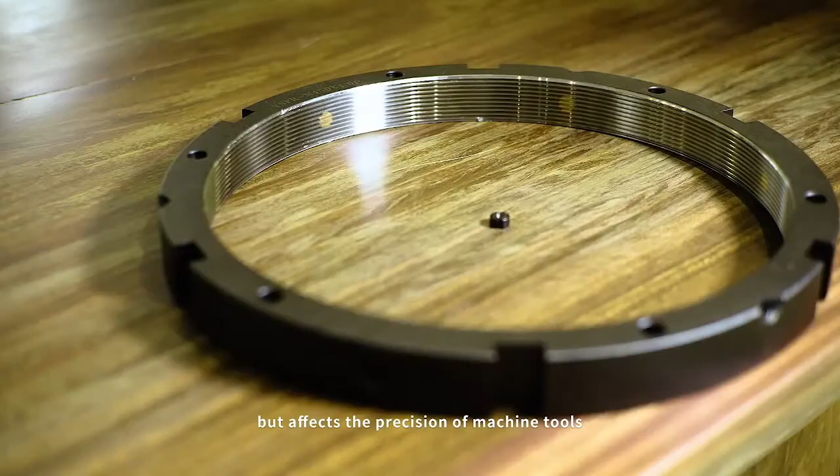No matter how advanced the systems technology of the world's factories, all require key precision components. The manufacture and supply of key precision components is a crucial point that affects all development. The manufacture of a nut is small and unremarkable, but affects the precision of machine tools.

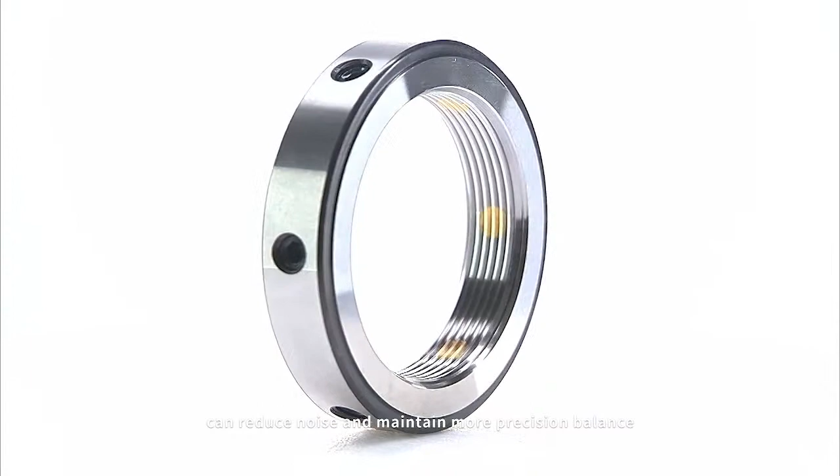YINSH Precision is one of the world's top 3 precision nut makers, fastening a spindle or ball screw on mechanical equipment. It can reduce noise and maintain more precision balance in dynamic environments through high-speed balance screws, or the world's only axial force sensor, to help our clients assemble products more precisely.

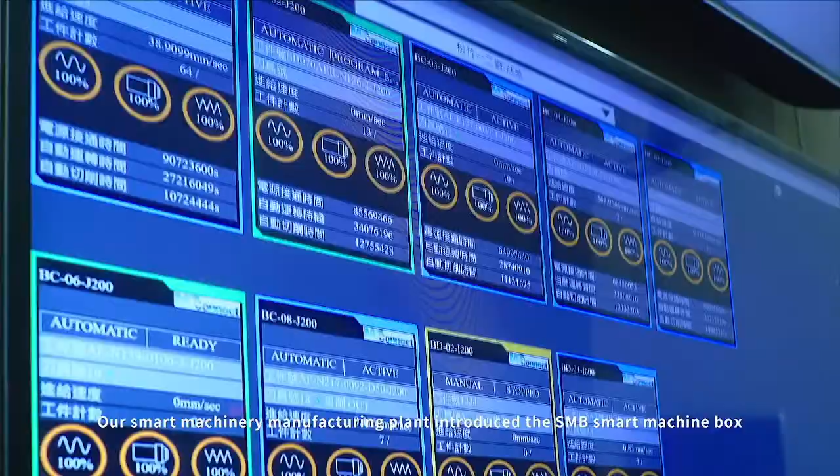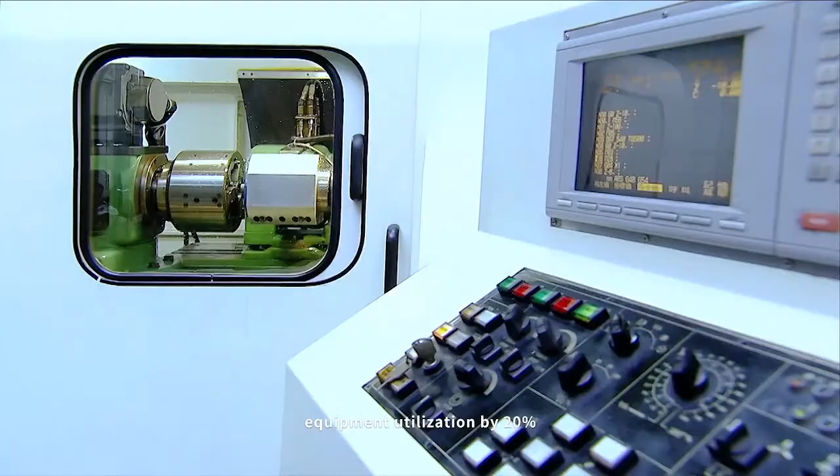Our Smart Machinery manufacturing plant introduced the SMB Smart Machine Box. Per capita output value went up 13.6%, equipment utilization by 20%, continually improving competitiveness. With algorithms to predict product life, you can cope with many emergencies.

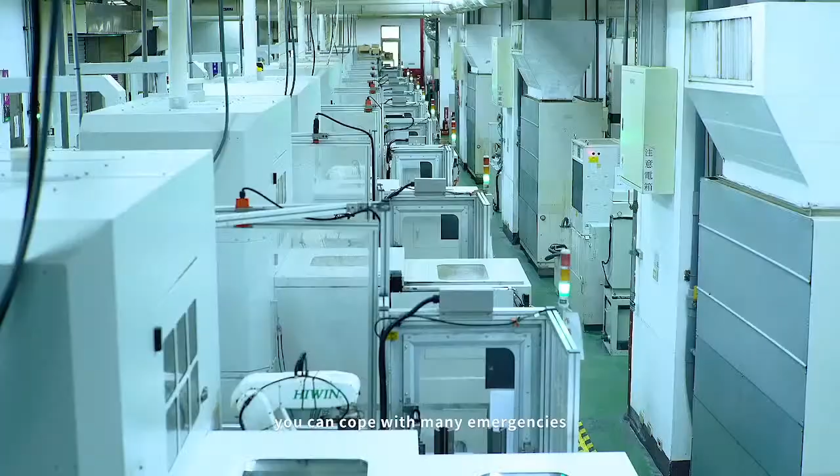HIWIN is a global top 3 precision ball screw and linear transmission component maker with R&D centers around the world. Of the machine tool equipment in use around the world, more than 1/3 carries our HIWIN brand. Thanks to our technology, these machine tools give precision to transmission control and mobile positioning.

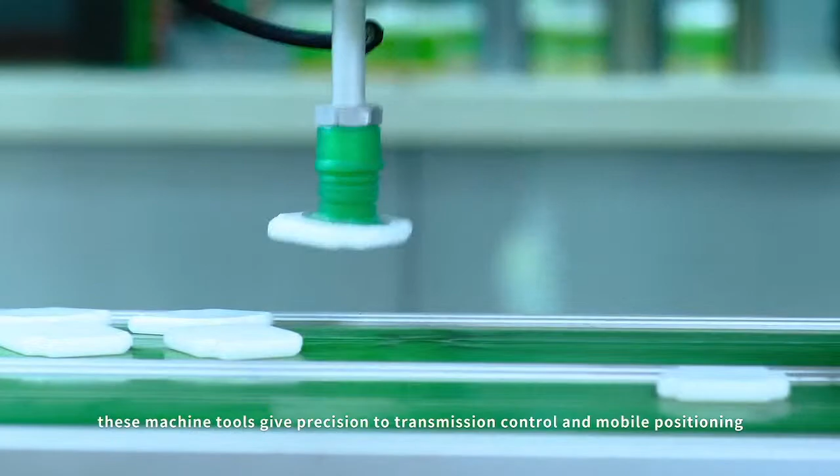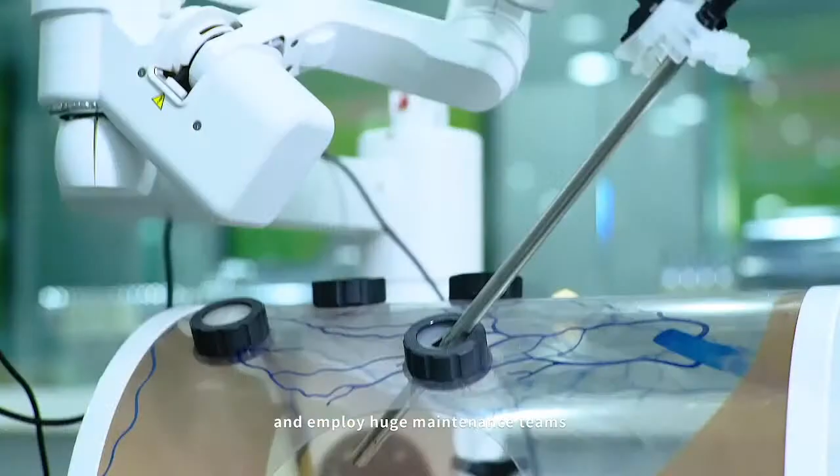We embedded sensors in smart screws that can detect lifespan, thermal deformation, vibration and lubrication levels. This means multinational machine tool customers no longer need to always be on alert and employ huge maintenance teams, saving them many costs and expenses.

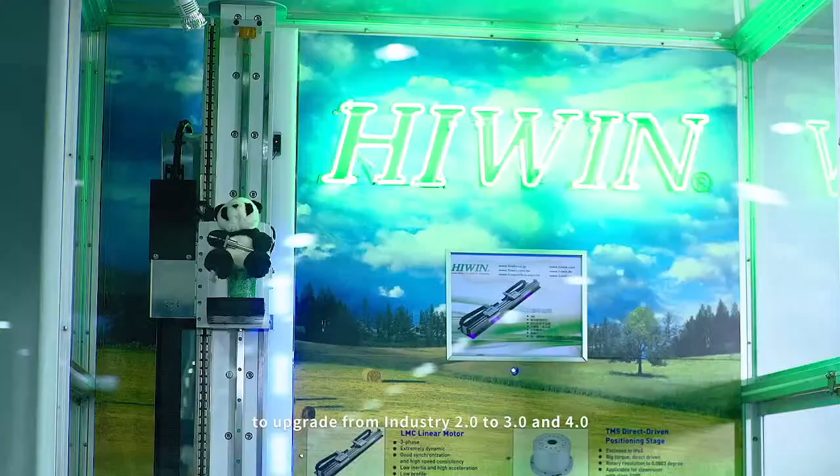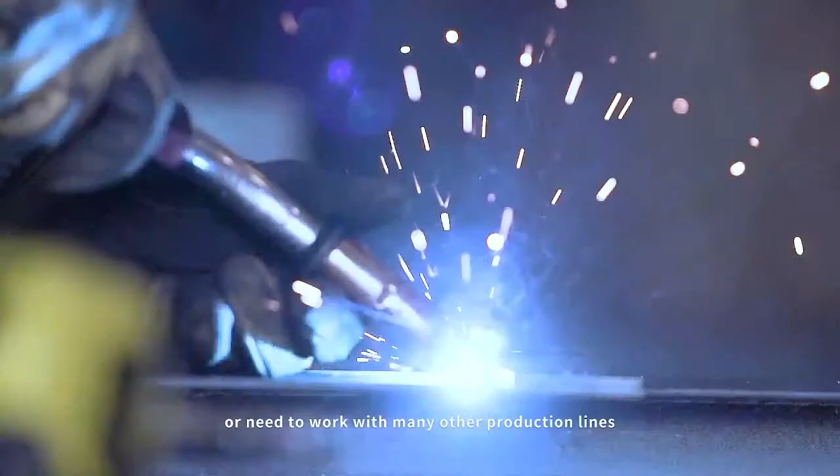The traditional plumbing and hand tool industries, with our help, have developed automated production lines to upgrade from Industry 2.0 to 3.0 and 4.0. The capacity of traditional production lines is limited. They can often only complete one link or need to work with many other production lines. Now, with full line and whole plant upgrades, a single production line can complete dozens of types of components.

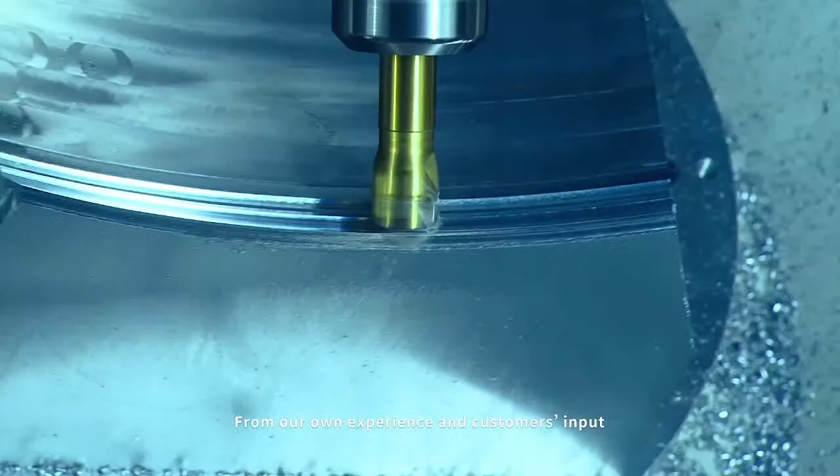As a crucial point, YINSH Precision and Highway must stand firm to inspire the midstream and downstream supplier line to stimulate more industry opportunities, drawing from our own experience and customers' input, helping more manufacturers to invest in smart manufacturing.

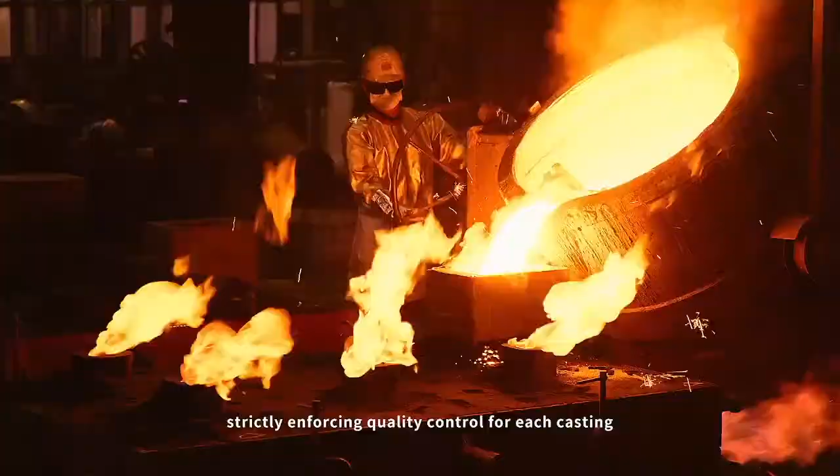All of YCM's casting is completed at its own foundry, strictly enforcing quality control for each casting, implementing the YCMPX lean production model to create their own smart factory.

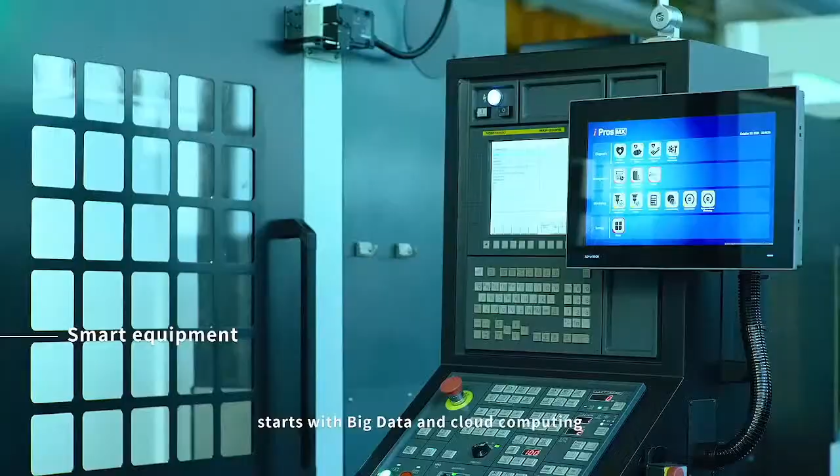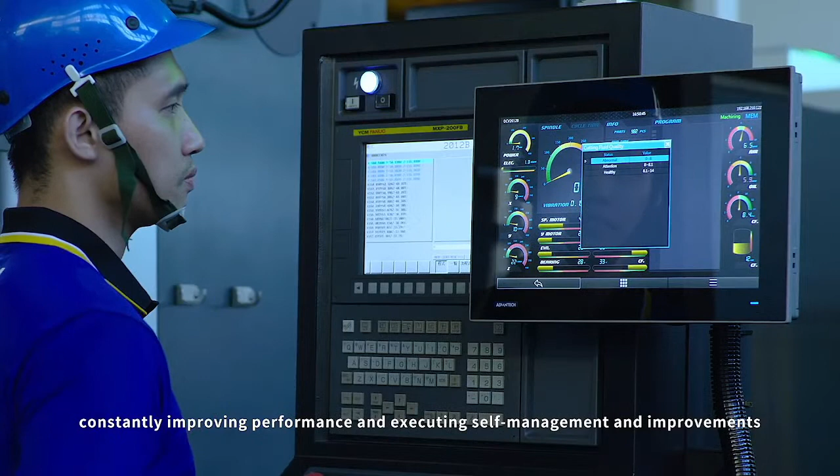We believe smart manufacturing starts with big data and cloud computing. The IoT Smart Management Platform links various automated and smart soft and hardware equipment, constantly improving its performance and executing self-management and improvements. Integrating IT, OT, and CT helps managers control the factory utilization rate and monitor OEE, achieving a non-stop, zero waste, and zero defect smart factory. Integration of industrial point, line, and surface is key.

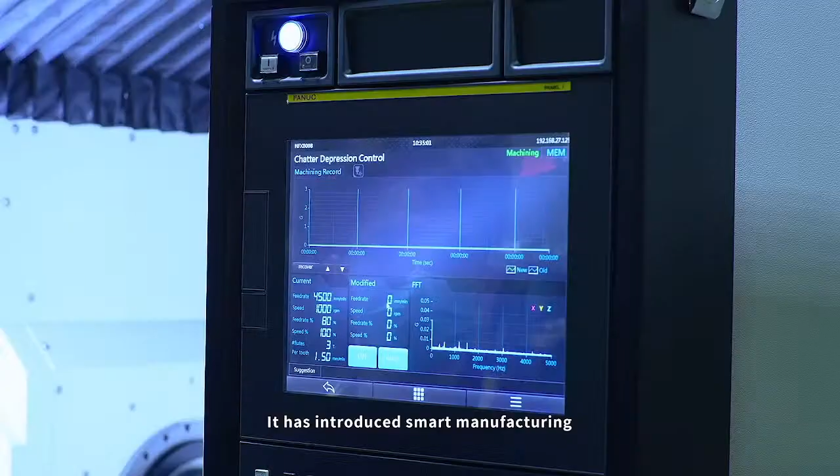DPI has been certified by Boeing and Safran and is a main supplier to the international aerospace industry. It has introduced smart manufacturing. Every year, it produces over 500,000 fuselage sections and engine components.

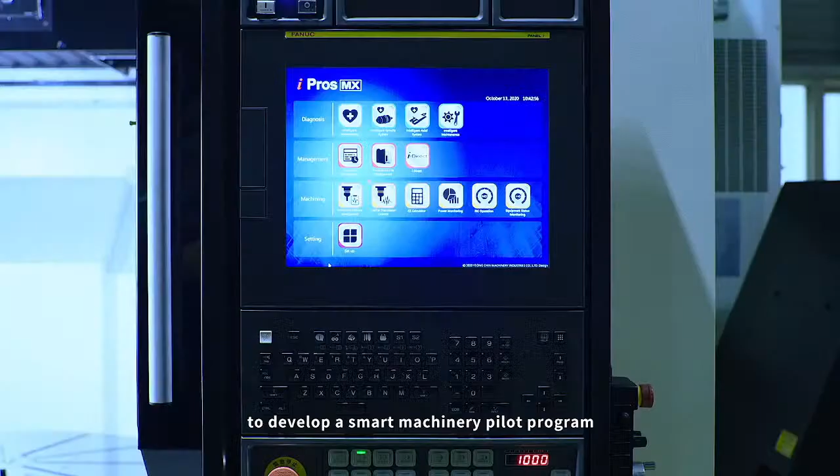Thousands of links rely on cooperating with other enterprises. Currently, YCM and DPI are collaborating to develop a smart machinery pilot program, introducing the domestically produced aerospace 5-axis smart machine tool, allowing the domestic industry to fully learn the aerospace industry's machining needs.

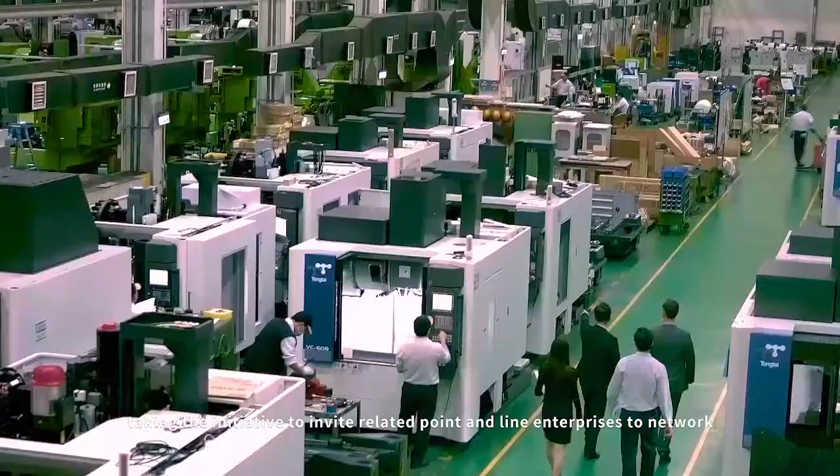Tongtai has for a long time invested in flexible, smart production lines, taking the initiative to invite related point and line enterprises to network, setting up its Tongtai technical application centers around the world to meet the local needs of auto, aerospace, and 3C companies.

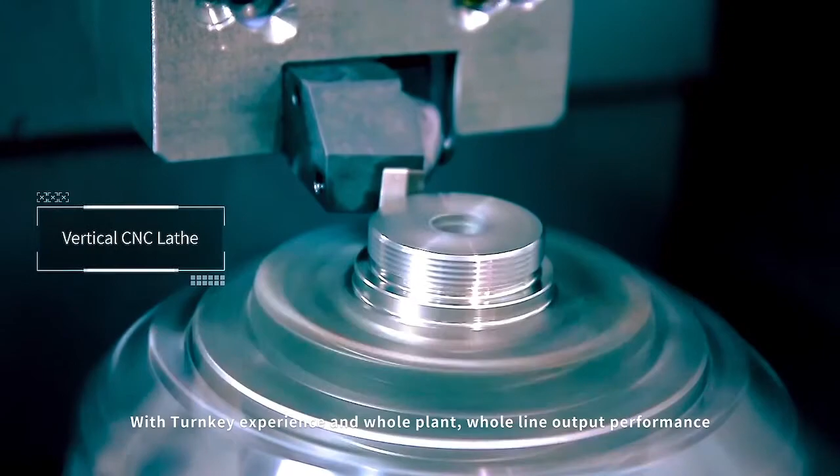With turnkey experience and whole plant, whole line output performance, it has seen tremendous results in software and automated system development. Tongtai is currently working with KYMCO, Siemens, and ITRI. The substantial benefits generated by up, mid, and downstream sectors create Taiwan's first motorbike key component smart production line. Its accumulated technology and experience will in the future be used in the auto, aerospace, and other industries.

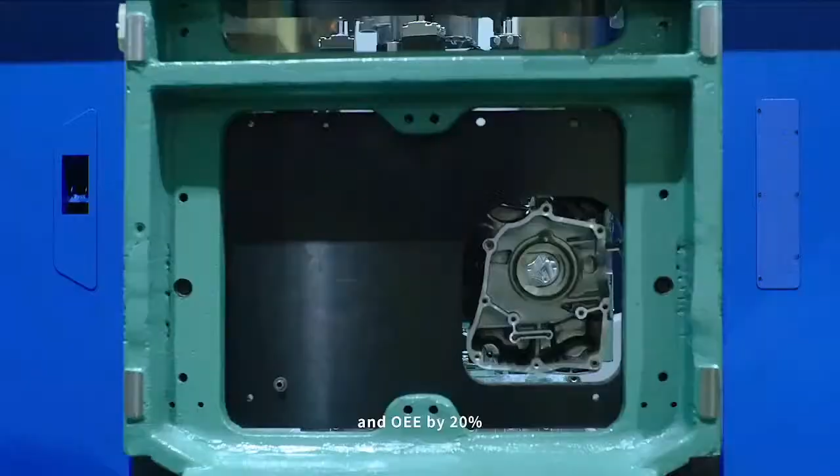KYMCO, with Tongtai's support, has upgraded to a flexible smart production line, raising productivity by 30% and OEE by 20%. One production line can make 6 types of components. The number of on-site workers can be reduced from 12 to 3, and changeover time reduced from 3 to 4 hours to just 2 minutes.

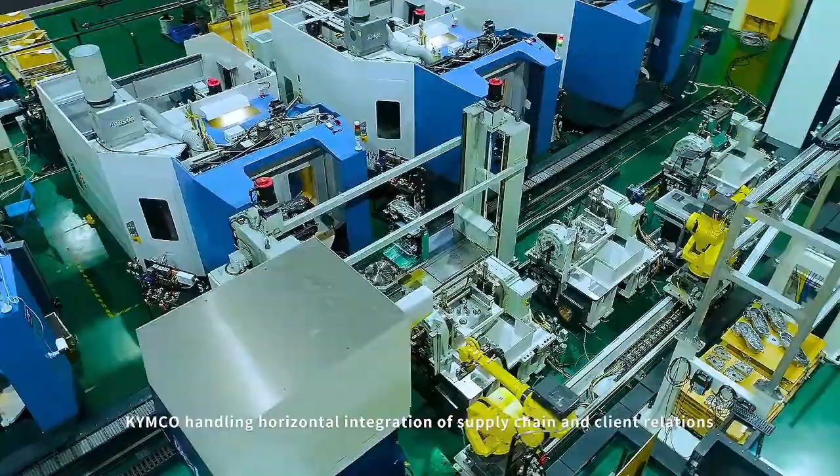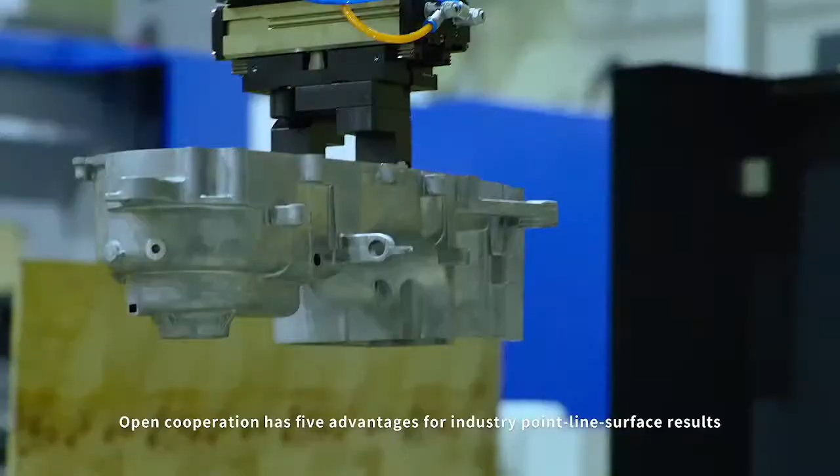KYMCO handles horizontal integration of supply chain and client relations, and Tongtai is responsible for joining the whole manufacturing workflow, including from top to bottom vertical integration of ERP, MES to SCADA systems. Open cooperation has 5 advantages for industry point, line, surface results, preparing early for future industrial challenges.

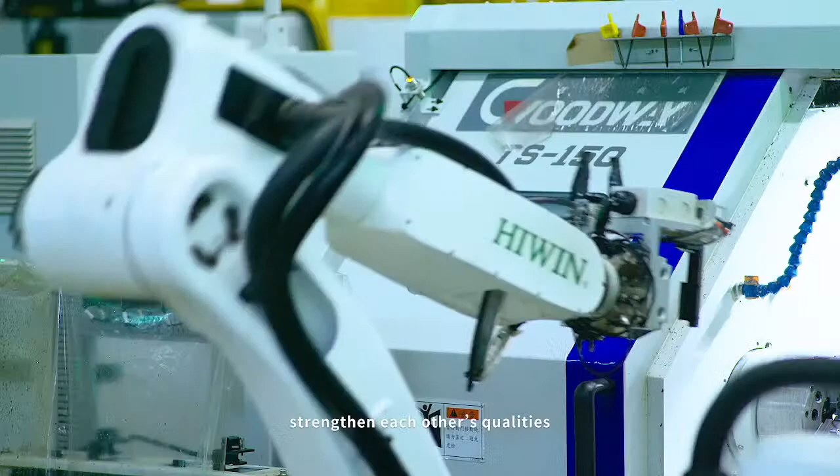In Taiwan, the impact of the smart machinery industry is everywhere. Businesses join hands, integrate exclusive key technology, strengthen each other's qualities, bring to bear mutual assistance, mobilization, and drive to provide excellent smart solution teams, checking the whole world's smart machinery safety and quality, striving to create great smart applications for life. This is our Taiwan Smart Manufacturing Philosophy.

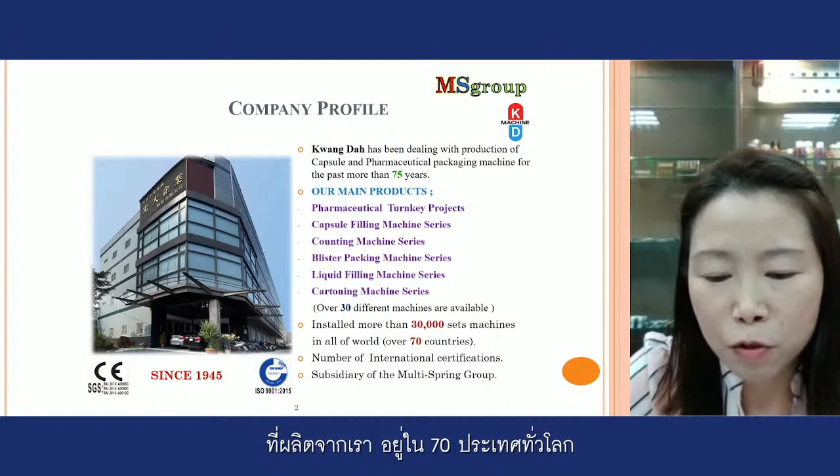We are an expert not only in customized, OEM, and ODM, but also Industry 4.0 technology of smart machinery. We will have more detail and description and video later.

Our major equipment are capsule filling machines. This machine with a tube filling system could fill powder or granule into the capsule. The blister packing line with a rotary sealing system could keep your product fresh, whether capsule or tablet, 4 times longer with our different sealing system, named the rotary sealing system.

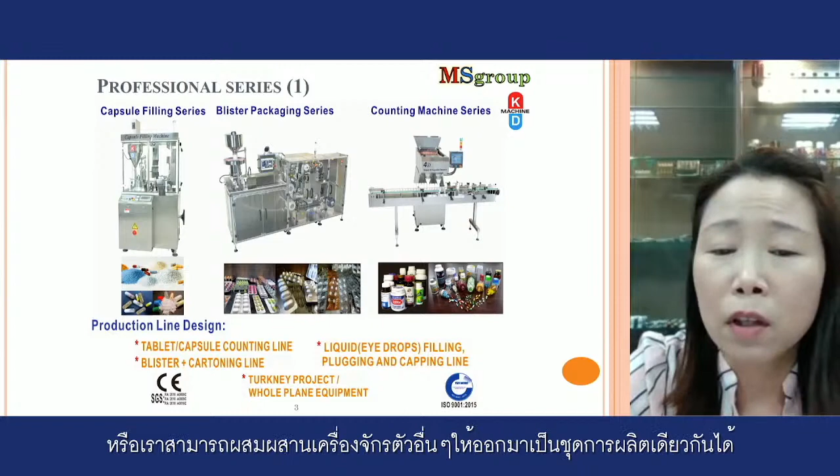Tablet and capsule counting and packing line with 4D detecting and 100% accuracy counting system. You may choose to operate an individual machine, or we could combine other machines for you to become a production line.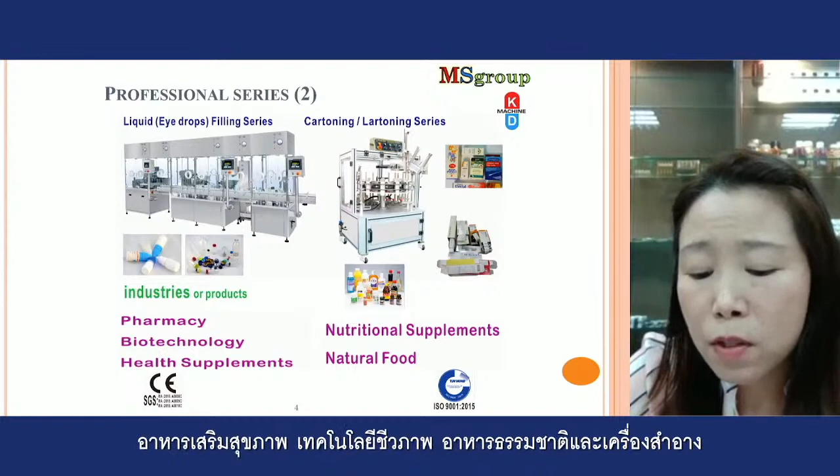Here are our liquid filling line and cartoning labeling machines. We also have powder processing equipment and turnkey projects. The major clients of ours are pharmaceutical, nutrition, health supplement, biotech, natural food, and cosmetics.

Now we would like to talk more about the ability of Guangda. Guangda is a parent company in MS group. We have 8 companies in the industry of packing equipment, electronics—including IC, IT, and programming—land development, and construction. 3 of us are enlisted.

Guangda is the expert of Industry 4.0 smart packing machines and customizability, not only because of 75 years experience, but also this background. As we know, real-time monitoring and management technology, the SCADA system in IIoT, is a common specification for Industry 4.0 machine tools now, but not so usual in packing machinery.

Now we already have the most mature and stable technology of SCADA IIoT for smart machines, to help management monitor, control, analyze, and correct in real time by your cell phone, your tablet, your notebook, or PC. You will see the producing data, including security, utilization rate, and the preventive maintenance reminder.

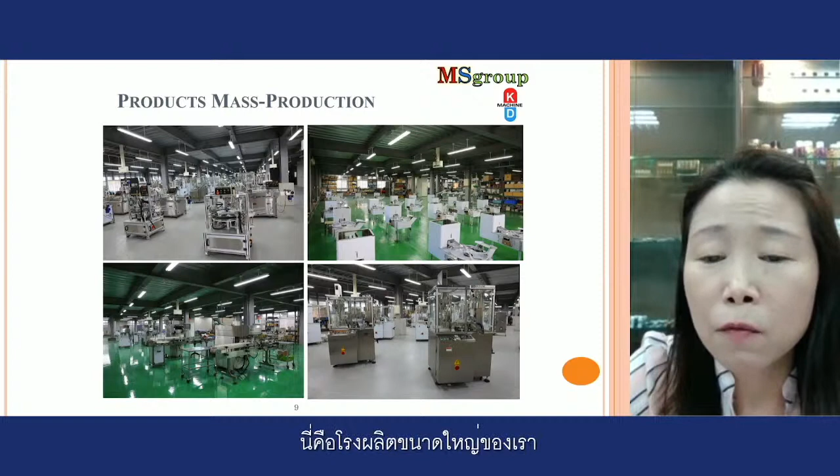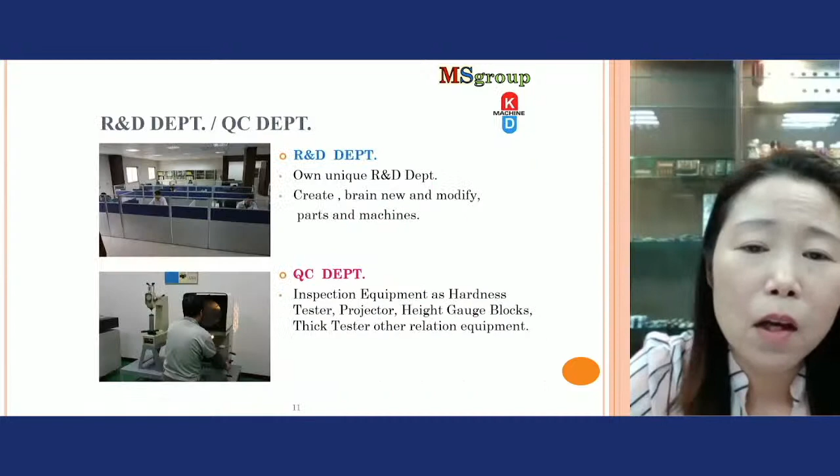Our warehouse, we could provide spare parts on time because we have sufficient inventory. We have our own R&D department and QC department to develop and quality control.

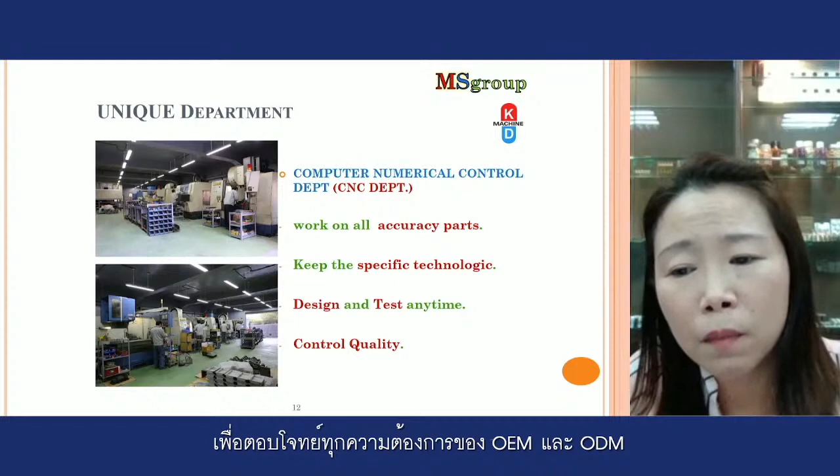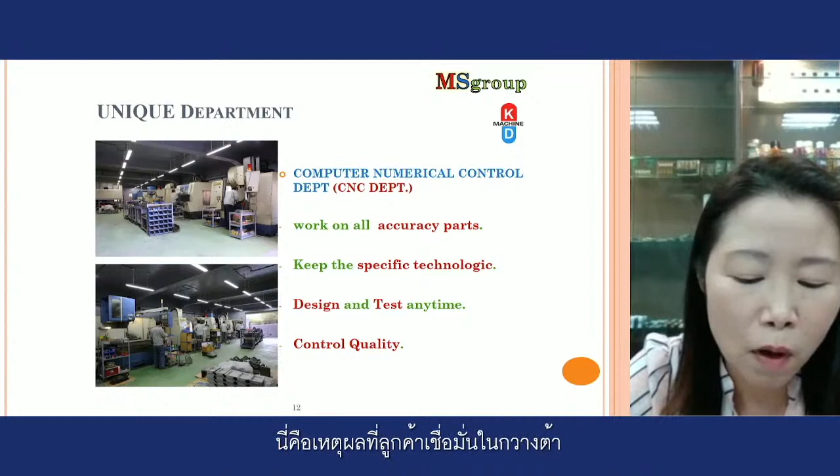For the customized requirement of OEM and ODM and the principle of constants, we have a complete CNC department with 6 CNC machines to meet any requirement of OEM and ODM and ensure that we could provide decades of high precision specification of spare parts and machines. That's why our customer can believe in Guangda.

We have attended many exhibitions all over the world, especially Interpack in Germany. We have attended Interpack almost 12 times, but not this year because of COVID-19. So we will see you at Interpack next year.

Here are our certifications: CE, ISO, and Dun and Bradstreet. We also could provide the material proof if the customer requests.

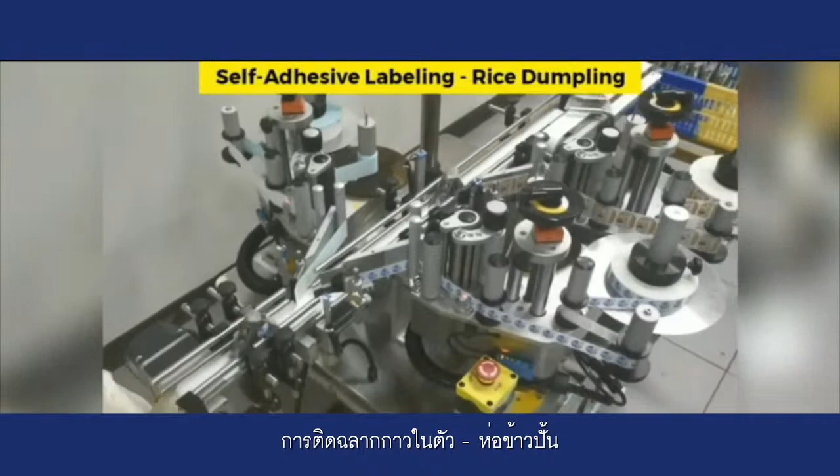That brings us the most abundant customized solutions. If you want any kind of labeling machine, no matter if it's the most easy standard type or a more customized complicated type, you can come to us.

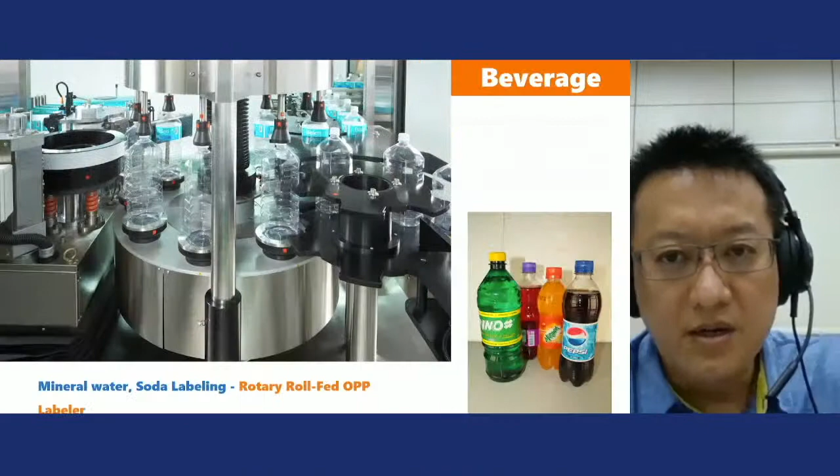The first video you see here is a rotary roll-fed OPP labeler. That's the one using the OPP film I'm talking about. The whole roll is like a plastic film, and it's cut on our machine, using hot melt glue to glue the film and roll it on.

The speed of this kind of machine can reach 300 to 600 bottles per minute. In the convenience store, if you see mineral water or soda, like in this picture, mostly it's labeled by this kind of machine because the label is much cheaper than the traditional shrink sleeve. If you see some tea drinks, they're still using the shrink sleeve, but their label is much more expensive than this kind of label.

The third part of the video is a rice dumpling labeler like this one. We sell a lot to food groups or conglomerates, like Uni President. They also run the 7-Eleven convenience store in Taiwan. They've got almost 1,000 machines from us. This is their rice dumpling making unit, and also the lunch box, like on the left. They all use our labeling machine.

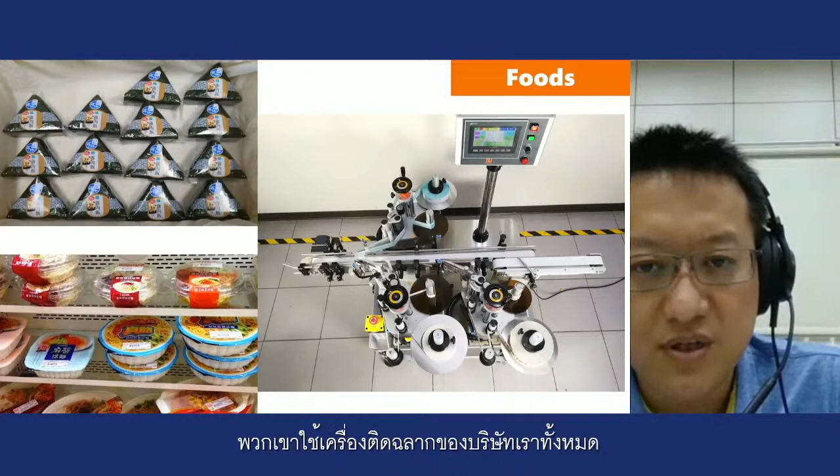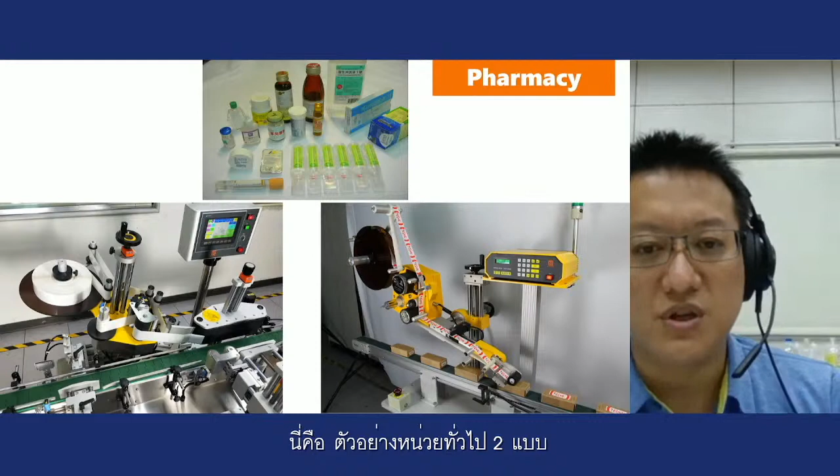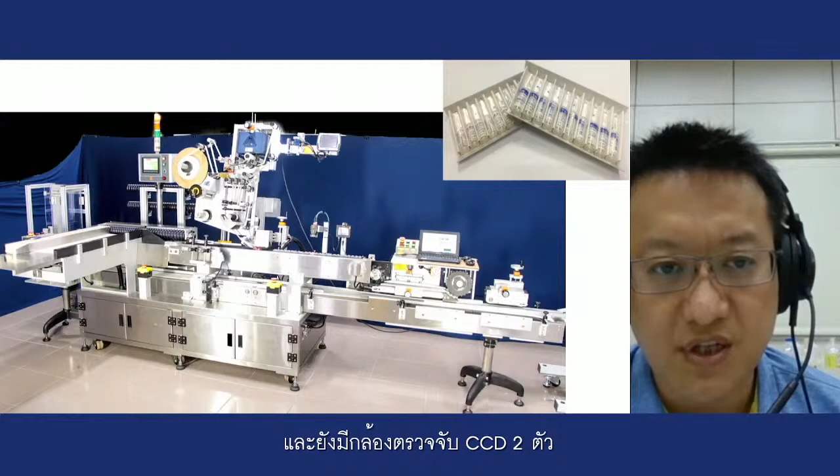This one is a more complicated and integrated machine. It can not only label the bottle, the little glass bottle, the ampoule bottle, but also do the coding. On top of the machine is a thermal transfer coding unit for the label, and also 2 CCD checking cameras to check that the typing is okay and also check the label. Underneath is a tray conveyor, so we can automatically put in the paper tray. So it's all integrated in one machine.

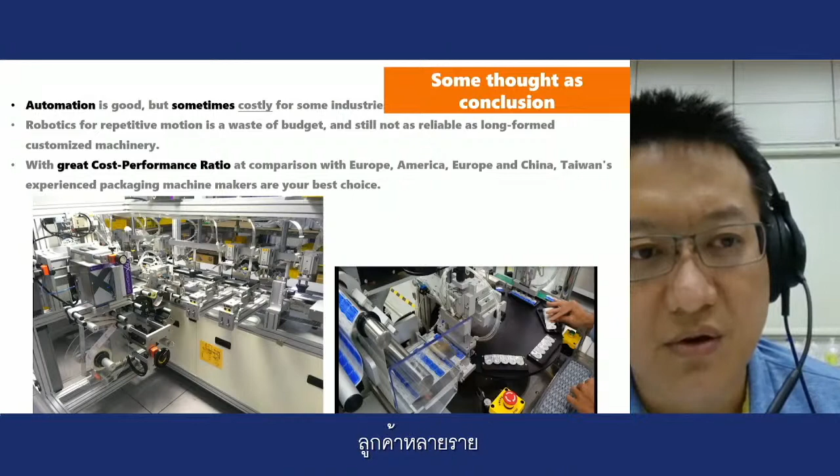I'll give some thoughts as a conclusion. Automation is good, but sometimes it's very costly. Many customers will jump into the robotic hand to do the automation. In my opinion, a reliable industrial maker like us is actually more reliable and cost saving for the automation. Especially compared with a Europe or American maker, the Taiwan machine has a better cost performance ratio. Our machine is good, reliable, and doesn't cost very much. So I think not only us, but the company in this presentation is very trustworthy. We are your best choice.

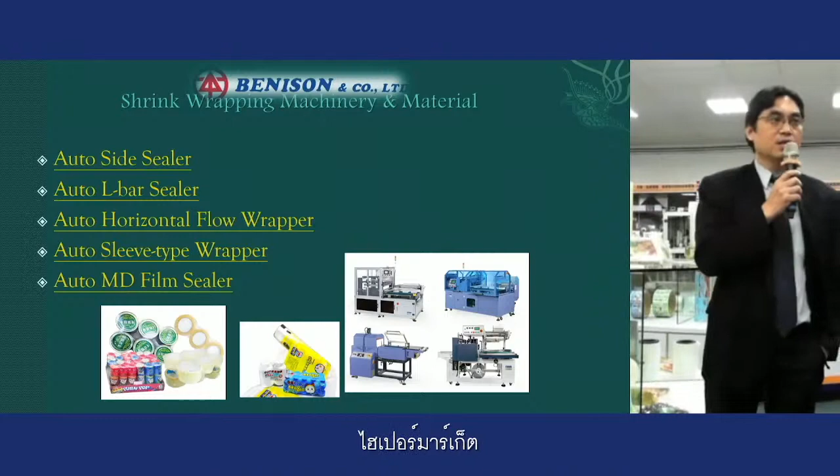We are going to show you what Benison has. This is the machinery product we call the shrink wrap. The shrink wrap can pack any kind of product, especially you can find it in the supermarket, hypermarket, and even some shops. Most daily products can be packed by our machine. I'm going to show you some very popular and common models of the machine in the market.

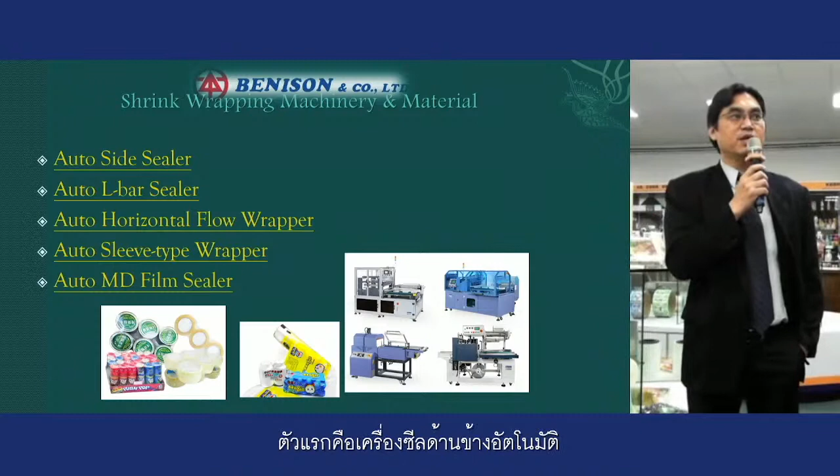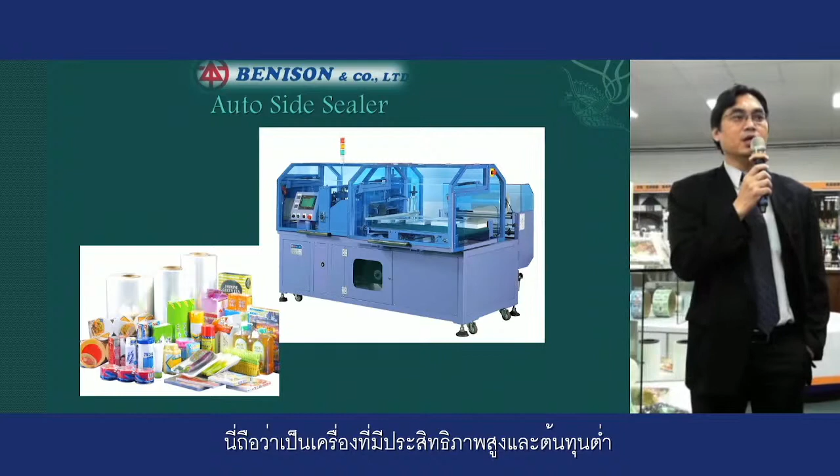The first one is the side sealer. The side sealer is higher speed, and the advantage of this machine is the higher speed, and you can pack any kind of product without limitation for the length. Whether we pack the product at 10 centimeters, 1 meter, 2 meters, or 100 meters, it's up to you, the machine can all work. Compared to the L-bar sealer, it can save about 1 inch of film, so it's a high efficient machine with lower cost - an advanced model compared to the L-bar sealer.

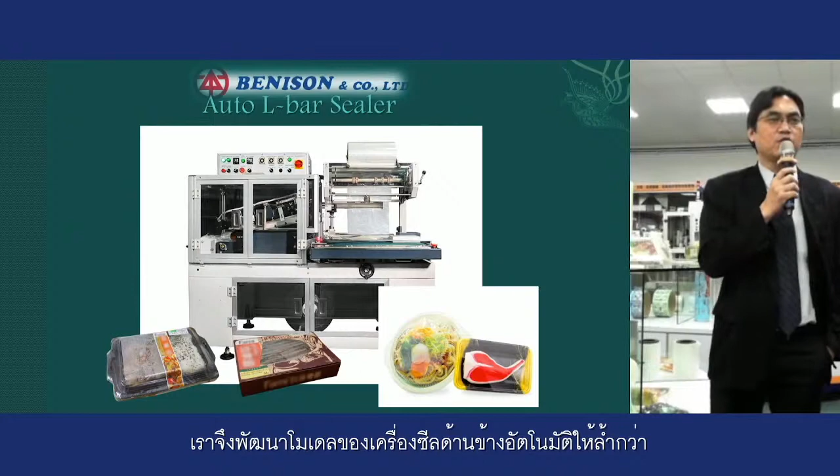What is the L-bar sealer? L-bar sealer is this machine. You can see the sample of a pack here, this is fresh food packaging in Taiwan, very popular especially in convenience stores like 7-Eleven or Family Mart - this is daily stuff for Taiwanese people. L-bar sealer is quite popular to pack such kinds of products. But compared to the side sealer I mentioned, L-bar sealer is quite old technology, more than 40 years old. So we developed an advanced model, the side sealer, instead. But the L-bar sealer is still popular in the market.

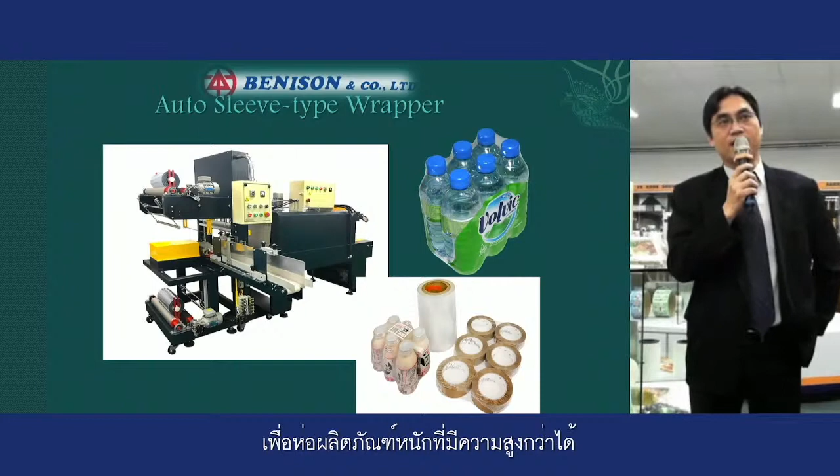Okay, we are going to another major item of Benison, the shrink sleeve applicator. The high-speed shrink sleeve applicator on Benison has many different models to match different market requirements. The speed can be 100 to a maximum of 600, based on customer requirements, and we have different level machines to provide. You can see the sample bottle here.

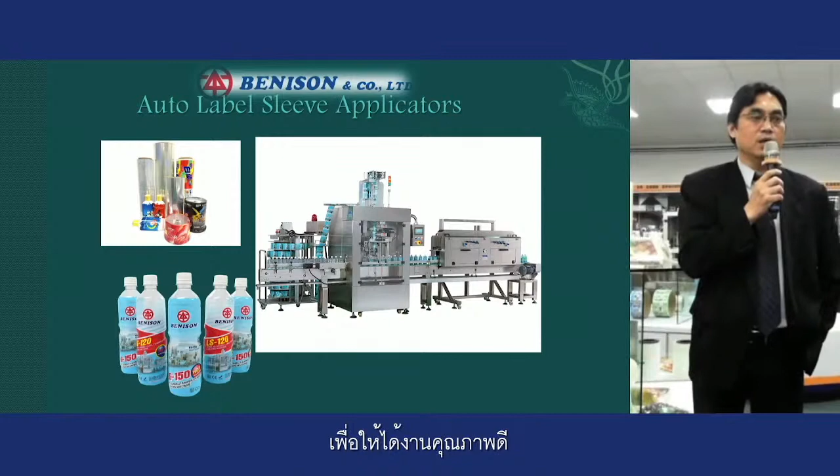This was packed by our machine with the steam tunnel, giving very good shrink quality. Now in the market people avoid PVC, and most use PET shrink label. PET shrink label is quite difficult to work with on shrink bottles, so we developed special technology. Doesn't matter if it's steam or hot air, we can work with PET shrink label to get good quality. Okay, this picture shows what we have.

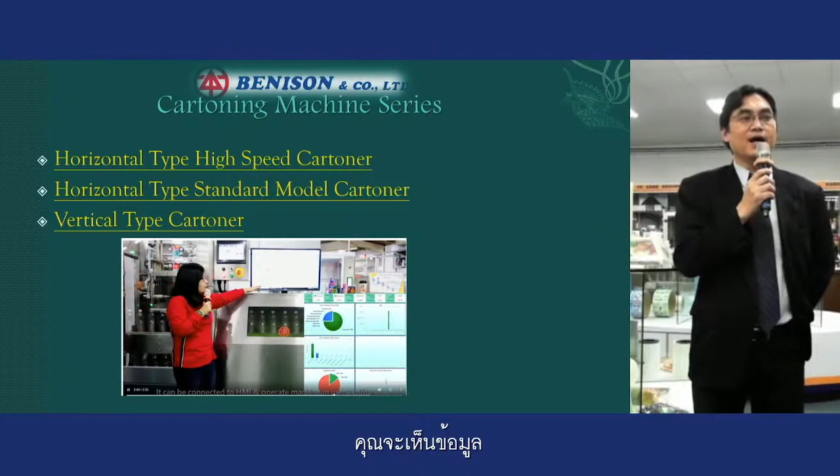We have an AI system, a smart machine working system. On the right corner of the picture you can see the data. Our machine has installed features so people can link it to their cell phone or laptop. You can move your cell phone or laptop anywhere to control the working system inside your working house. The data shows machine working capacity, troubleshooting, defects, and collection numbers to help you with modification and change your production with higher efficiency.

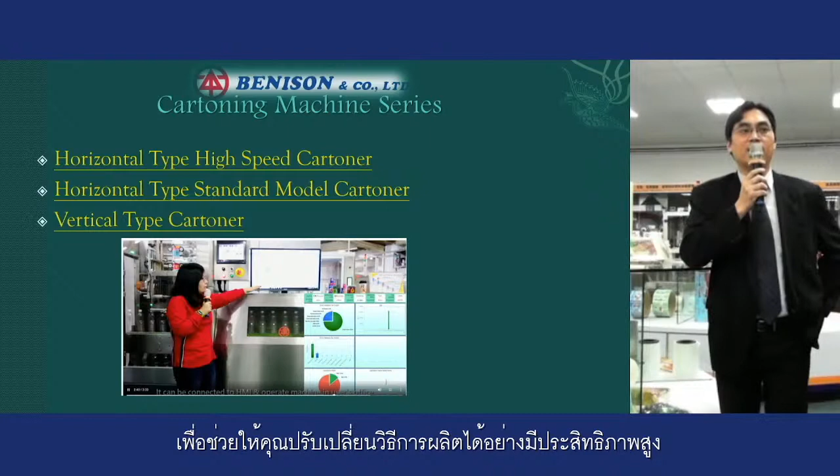This is the cartoning machine, 300 per minute. This is the maximum, highest-speed running machine in Taiwan. Benison is the only machine maker for this high-speed machine in Taiwan. So if you have demand for this machine, you can contact Benison. We have a lot of experience working with it.

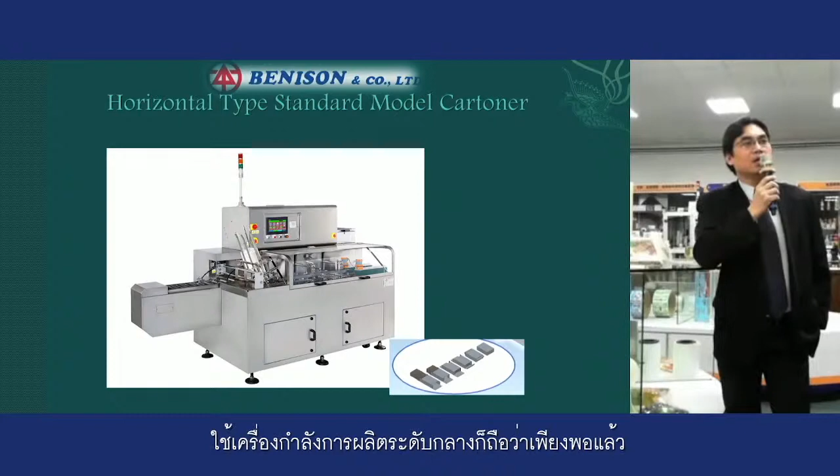This is a standard cartoning machine. Its speed is about 60. It's for the middle level market, and most people can work with it. I mean, 80% to 90% of customers working with the middle level machine will be good enough.

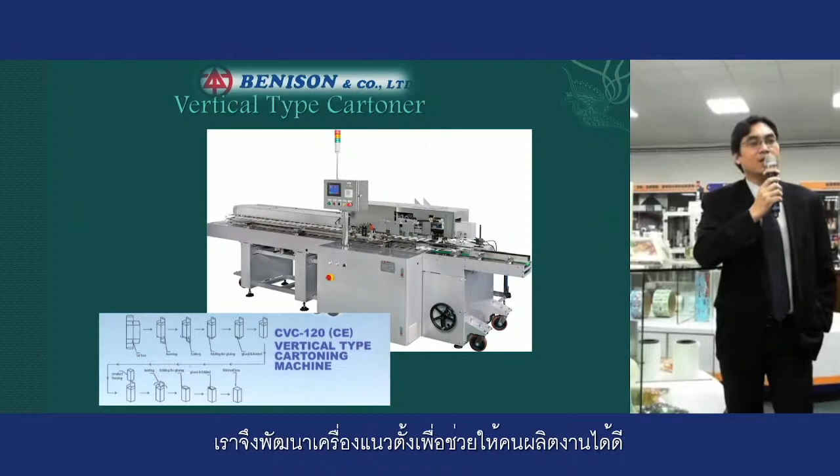This is a vertical cartoning machine. Some products cannot be laid down to fill into a horizontal position, so we developed a vertical one to help people with their production.

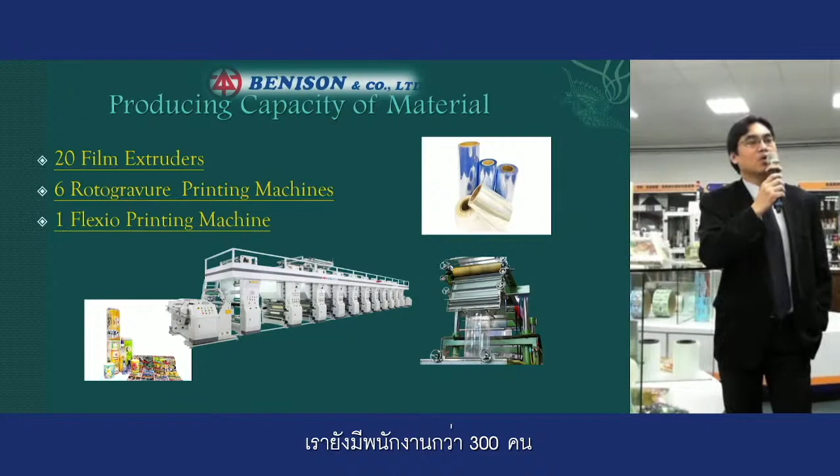Benison has a film extruder for the shrink film, and we move the shrink film to the Taoyuan plant for converting and printing. Benison has 6 rotogravure printing machines and 1 flexo printing machine, and a lot of converting machines like the slitter and rewinder. All our 300 workers stand by to give the best service for our customers with high quality products.

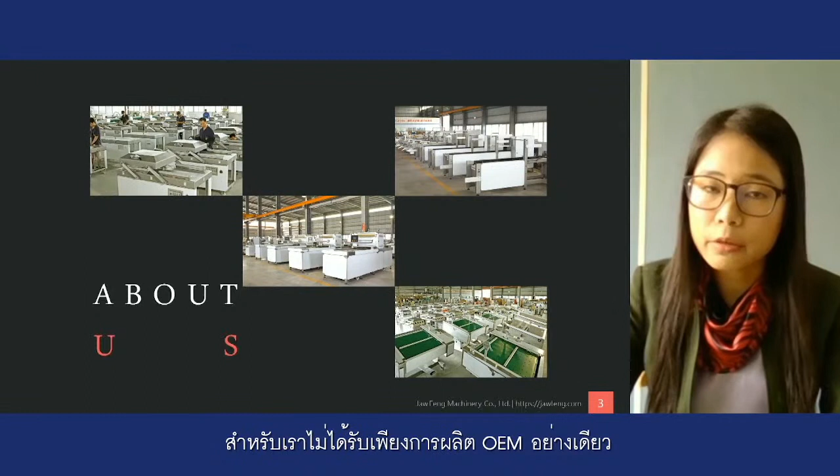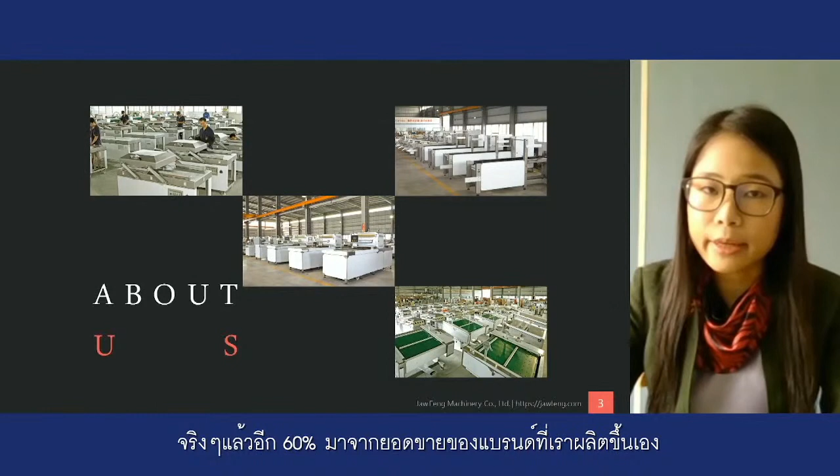Hello everyone, this is JawFeng Machinery from Taiwan. I'm Mary, and today I'm going to give you a brief introduction of why this is the best place for you to start. We are a professional manufacturer in Taiwan of vacuum packaging machines. We were founded in 1983. We have clients all over the world, and we also take lots of OEM products, which we OEM for about 35 to 45 brands overseas. OEM products are not the only products we produce - OEM only takes about 30% to 40% of our total sales. The other 60% is actually selling under our own brand, New Diamondback.

So today we are going to give you a little bit of knowledge about what kind of vacuum packaging solutions you will be able to find if you work with us. The vacuum massage tumbler machine is one of our popular machines, providing especially for the meat industry. This kind of machine works for shortening the pickle time. For example, if you have meat products you would like to mix with sauce, this is the best choice you will be able to get. We also provide a wide range of capacities from 150 liters up to 4,000 liters.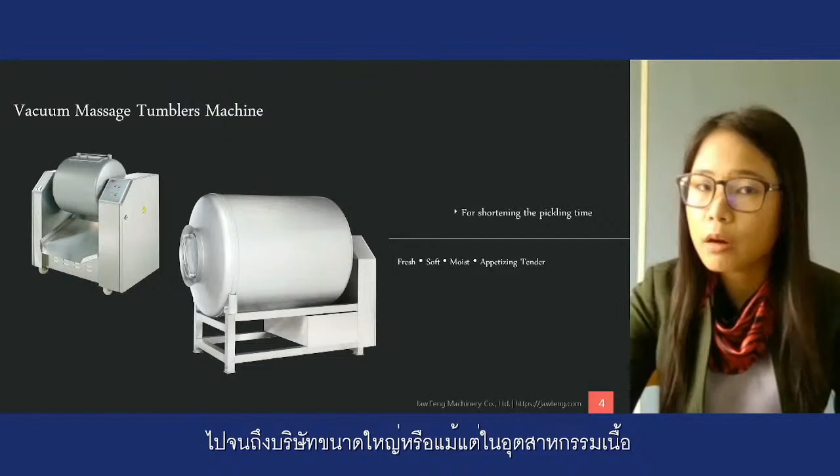So it is suitable for even a small scale cafeteria until a big scale enterprise, and even the meat industry. So with vacuum packaging solutions, these are our main points. We are going to tell you a little bit about it.

So we have different kinds of types of vacuum packaging. From the beginning, we'll introduce you to the chamber type of vacuum packaging machine. This kind of machine is friendly design, so it's really easy for even a beginner to use. The reason why people choose vacuum packaging is because they would like to maintain the products, especially food, the freshness.

And also they would like to extend food shelf life. For clients who also have electronic parts or even metal parts, the reason why they choose vacuum packaging is they would like to prevent rust and dampness. So with the chamber type vacuum packaging machine, it's a really good choice for clients who have lower production, and it is a beginner machine.

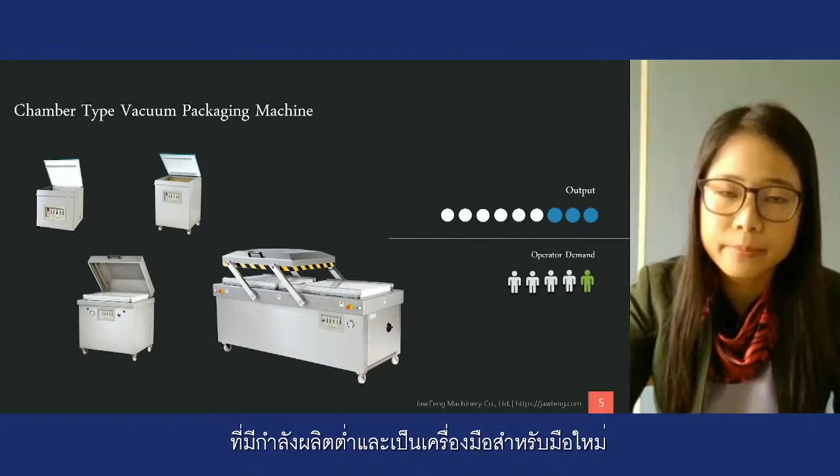So now we move to clients who have a little bit higher production requirements. The automatic belt type vacuum packaging machine is actually built for clients who would like to have lower operating demands, but require higher production. So each machine is built with a touch screen and different kinds of options.

So of course, with packaging solutions, it's always not just one type. What we introduced before is only packing with pouches and bags. So now we are going to tell you a little bit more.

When you would like to move to tray packing, it's because some products, to maintain the shape of the product itself, would be crushed if packed with a bag. So they will consider using a tray instead of bags. So this is the timing when the tray sealer comes in.

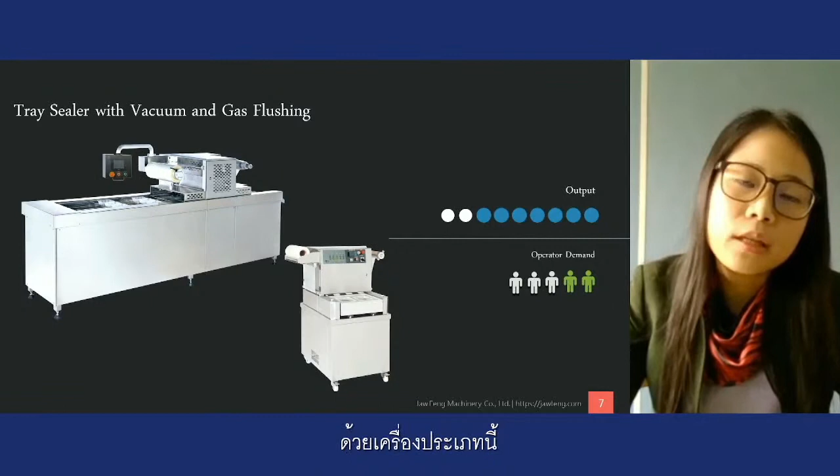Our tray sealer actually has vacuum and gas flushing functions. Even if you only want a simple seal, you can also choose this type of machine. This kind of machine also requires you to have some air supply as well, so it's a more automatic design.

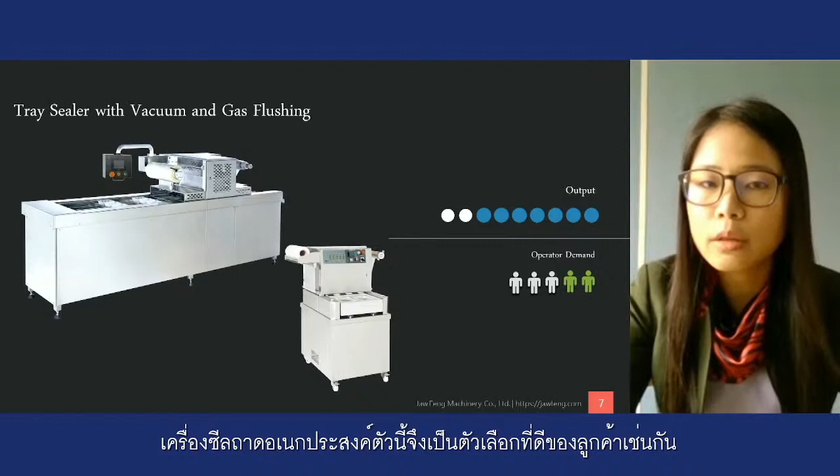But for this one, for no doubt, you will have the final product which has a really beautiful and clear appearance at the end. Packaging by tray is also one of the good choices for clients.

So for the thermoforming packaging machine, this is actually today our main topic we would like to introduce you to. This is the highest efficiency vacuum packaging solution you will be able to get. With the thermoforming packaging machine, it's different than the traditional one. With the traditional one, either you will need to prepare a tray or you will need to prepare bags.

But with the thermoforming packaging machine, you actually prepare a raw material which we call film. It will form automatically on the machine the bags, or even the tray you need. So the only way you use this machine is the operator just needs to load the products at the loading area.

With this kind of machine, it's actually more for big industry. They would like to have an automatic line, so less operators, but with the output level, this is the highest you will be able to get in the vacuum packaging industry. So for this one, we also sell to more than 100 countries.

With our experience, we are confident that for vacuum packaging solutions, if you're working with us, you will be able to find the most suitable products. And with us, you don't need to worry about any maintenance problem as well. We have more than 40 years of experience working in this area.